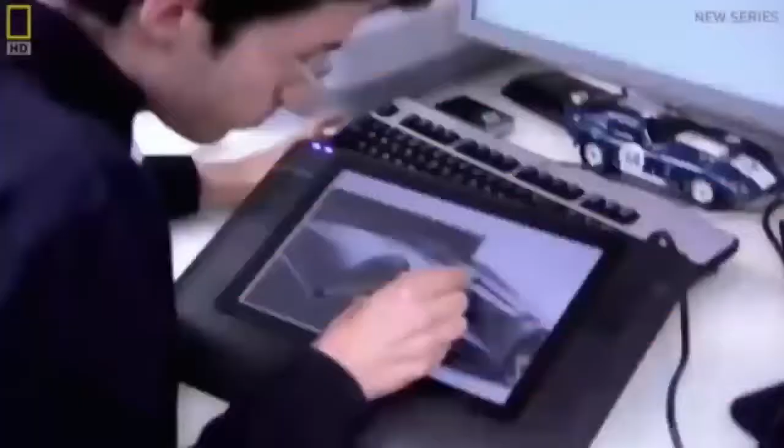But this will be no simple reworking of Lamborghini's old flagship models. Its engineers and designers are given the task of starting with a completely clean slate. And at its Megafactory in northern Italy, the Lamborghini team has been stretched to its limits to fulfill those expectations. Now, as its latest creation takes to the road, it will be seen if the high-risk strategy has paid off.

Lamborghini has been responsible for some of the world's most iconic sports cars of the past half-century. 350 GT, Miura, Countach, Diablo. The brand has achieved global recognition for its no-holds-barred approach to automotive engineering. Its extreme and powerful machines have placed it among the supercar manufacturing elite for decades. But there's no room for complacency in this increasingly crowded marketplace. And a decade since the launch of their last flagship model, the Murcielago, it's time for Lamborghini to flex its muscles once again.

It's up to Stephan Winkelmann, the company's CEO, to come up with a bold approach. One of the toughest things was to give the right briefing. And it took us weeks and months. And once I went home and I was thinking about it, so easy. It's just down to 2 words: no competitors. 4 years of intense development follow, conducted in fiercely secretive conditions. Our factory was as closed as Fort Knox. We had to prevent anybody from coming in and taking any picture to avoid leakages.

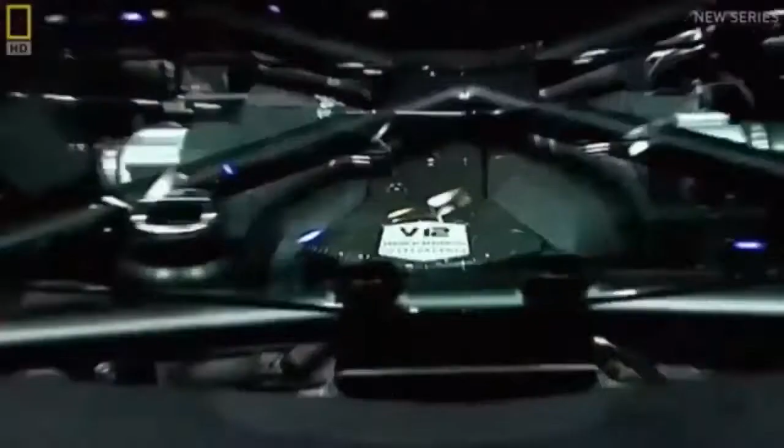Powered by Lamborghini's trademark V12 engine, the Aventador can reach speeds of up to 350 kilometers per hour, and it travels from 0 to 100 in under 3 seconds. It's their fastest car yet. But remarkably, speed isn't even top of Lamborghini's priorities for the Aventador. Stephan Winkelmann has laid out his vision in a manifesto for the future of the supercar.

Now, in our days, it's much more important to speak about the power-to-weight ratio, so the balance between the power of the car and the weight of the car. And for us, in the future, it's much more important to reduce the weight because you get a better feeling, a better driving experience. The Aventador is the first test of this new blueprint. And the National Geographic channel has been given unique access at the Lamborghini factory to witness the creation of some of the car's first incarnations.

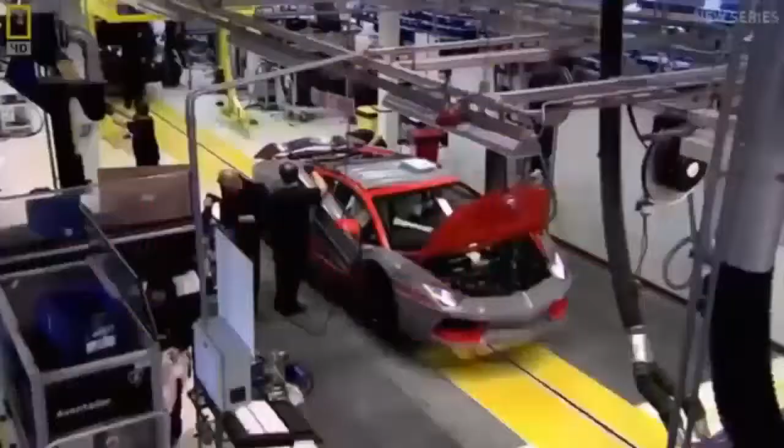This is Sant'Agata Bolognese, a typically picturesque town in the heart of Italy's Emilia-Romagna district. But it is in fact anything but typical, as it's home to Lamborghini, one of the world's most renowned supercar manufacturers. The factory is situated in the heart of what is known as Motor Valley in northern Italy. Sant'Agata is intrinsically linked to Lamborghini's success, according to its head of communications, Raffaello Porro. Everybody in the world recognizes our cars come from Sant'Agata Bolognese. And so our factory is a kind of temple where people come, you can say a pilgrimage, to visit where those cars come from.

The factory has seen many changes over the years, but its purpose has never wavered, to produce vehicles that challenge the status quo. And a largely local workforce is a vital part of that ethos. They're coming from this region, not even from the region, they're coming from this part of Emilia. You know, we are in Emilia-Romagna, it's the Motor Valley, and this is in Emilia. So a lot of our people are not only living here, they were born here, they are here since generations, and a lot of workers we have in our plant are here at the second generation.

These people are Lamborghini's lifeblood. Over 400 individuals working with a singular aim: to produce high-end vehicles that consistently capture the public's imagination. In the last couple of decades, a new breed of creative and high-tech vehicle specialists has emerged. Companies such as Pagani and Koenigsegg have set their sights on toppling the most revered names in supercar engineering. Names like Lamborghini.

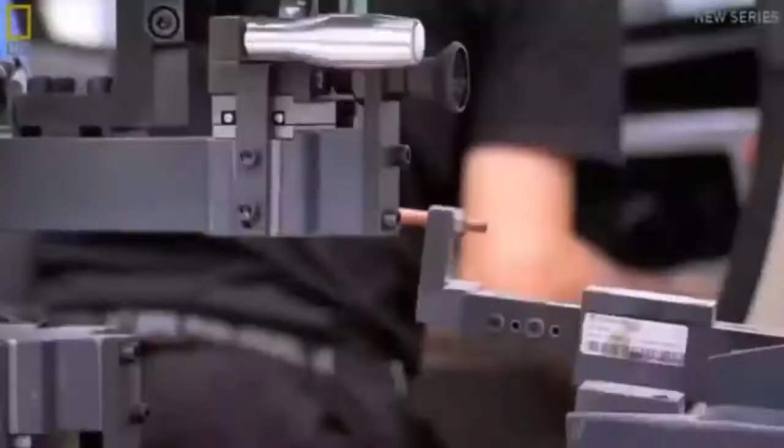But it's unlikely that this Italian giant will let its mantle fall without putting up a fight. An attitude embodied in the company's emblem, the Raging Bull. Partly inspired by the bravery of Spain's legendary fighting bulls, one of which showed such fearlessness in battle that it was awarded a trophy for its courage in 1993. Its name was Aventador, and almost 20 years later its legacy lives on in Lamborghini's latest model. It's Aventador's battling spirit that Lamborghini's development team must channel.

In 2007, they're faced with the daunting task of creating a supercar that sets the standard for all others. Maurizio Reggiani, head of research and development, realizes that the only way of doing so is to take a step into the unknown. We had to completely redefine the car, to start from a blank sheet of paper, and on this sheet determine, for each function, all that was needed to ensure that we'd have the best car in the world, to completely redefine what constitutes a super sports car.

To start from a completely clean slate is extremely high risk, and it's up to Reggiani to convince the board that it's the right thing to do. This was one of the hardest things. Why? Because the project we were presenting had nothing in common with the old Murcielago, not with anything that existed in production at all. So it really meant beginning from scratch, with all the risks that come with that.

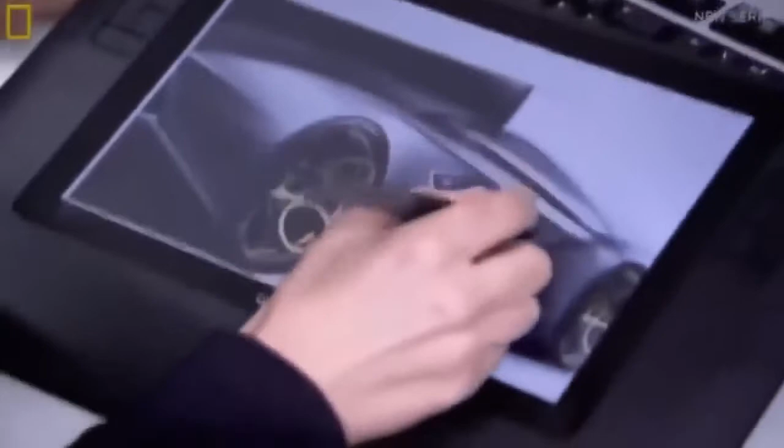But the board decides the risk is worth taking. At the end of the day, they understood very well, because this is, again, about what Lamborghini is all about. You know, to recreate and to be always revolutionary in the approach. The spirit of innovation is apparent in every fibre of the Aventador, as Lamborghini know that the fight to stay at the top won't be won through half measures.

And nowhere is that combative approach more apparent than in their focus on lightweight construction, which they've taken to new levels with an entirely new concept for road cars: a full carbon fibre monocoque. These structures are common in racing cars, but the high cost of materials and laborious production methods have made them unavailable to supercar manufacturers, who've had to combine carbon fibre with cheaper, heavier elements, such as aluminium. That is, until now.

The development team has devised a method that allows this race car technology to be mass-produced. But it requires a specialist facility that's up to the task. So in 2009, they build a whole new megafactory just down the road from the company headquarters, devoted to constructing the Aventador's unique carbon fibre body. Which, being just 147.5 kilograms, helps make the Aventador significantly lighter than the Murcielago, considerably improving the all-important power-to-weight ratio, and in turn, the handling.

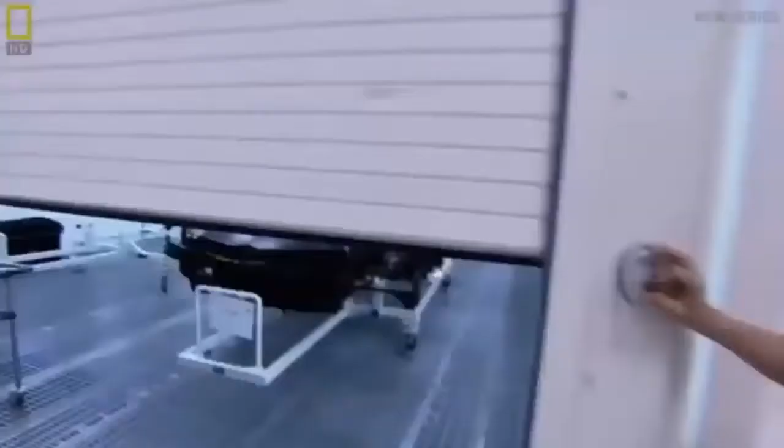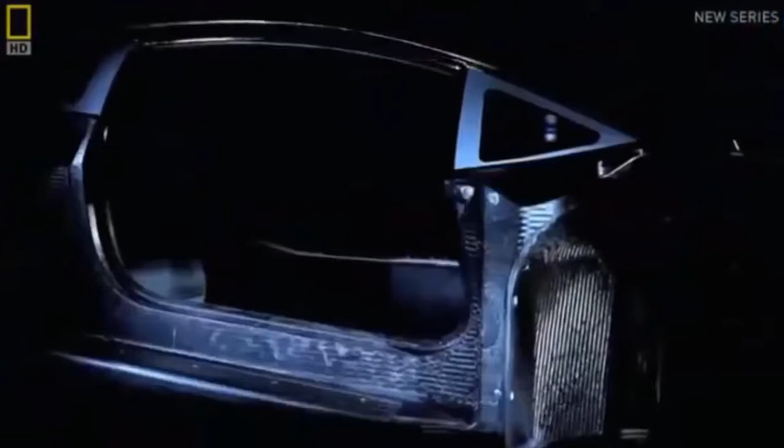Lamborghini hopes that this innovation will stave off the threat by the new wave of rival companies. Lamborghini knows well what it's like to be the cocky young upstart, vying to unsettle the established names, as that's how it began almost 50 years ago. The man upsetting the status quo back then was the company's founder, Ferruccio Lamborghini. He had made a fortune from a tractor manufacturing business and used some of his money to satisfy his love of sports cars.

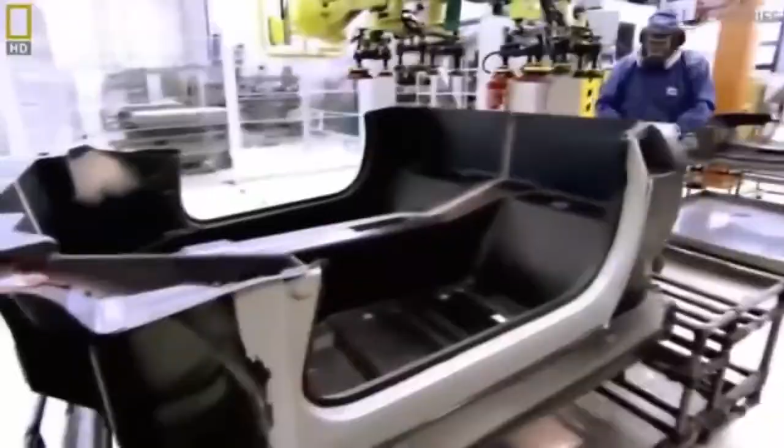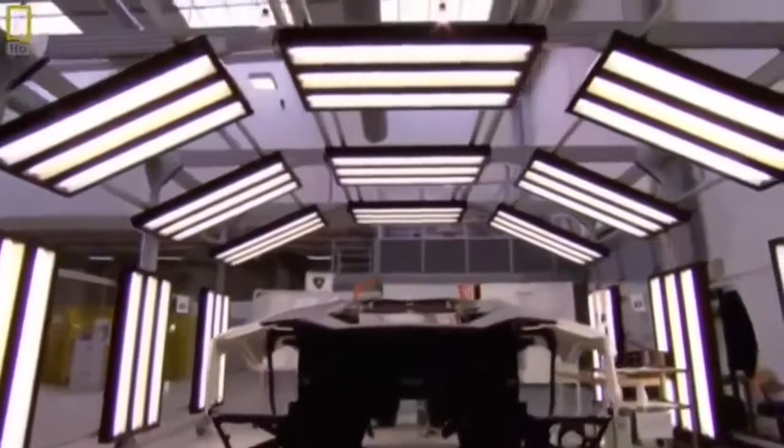According to Lamborghini legend, when he went to Ferrari to critique some of their parts, his views were dismissed. He got a negative response out of some requests he had and proposals to make a better car. And so he said, I will found my own company and I will create the best super sports cars ever. He established Automobili Lamborghini in 1963, and for the next few years he toiled furiously to achieve his goal. The cars he created were well received, but it wasn't until the launch of the iconic Miura in 1966 that Lamborghini really made its mark. The tractor maker had succeeded in breaking into the exclusive world of supercars with his bold new enterprise.

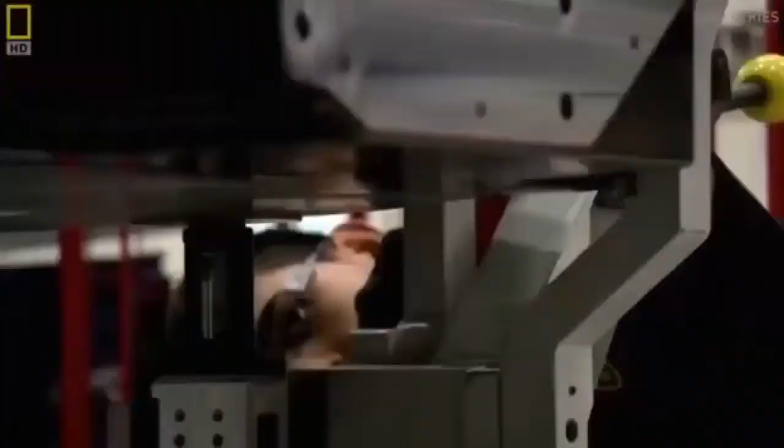Almost 50 years later, despite having joined the ranks of well-established sports car manufacturers, the company still strives to be edgy and uncompromising. As demonstrated by its approach to the area it believes will define the future of sports car engineering: lightweight carbon fiber construction. The company's relationship with carbon fiber goes back as early as the 1980s, when it created the Countach Evoluzione, a concept car which experimented with the use of composite materials.

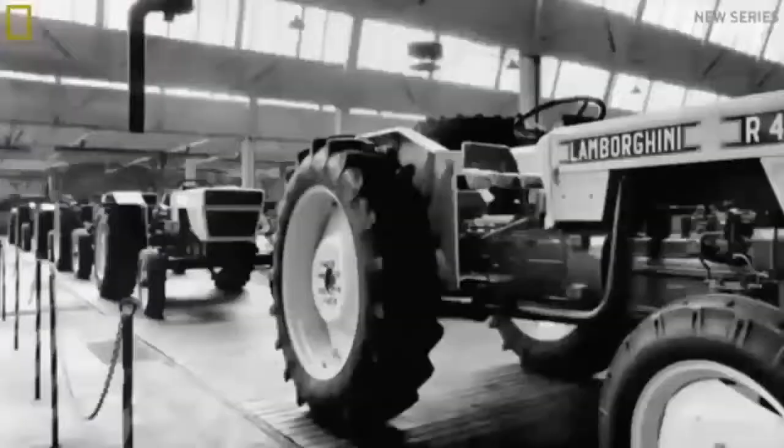It was dreamt up by the newly formed Composites department, whose successor has made many inroads into research and development of lightweight composite materials. And discoveries made here mean that next door, the company has been able to construct its new carbon fiber production facility. The man given this task in 2009 is Ranieri Niccoli, Industrial Director. And he must devise it completely from scratch.

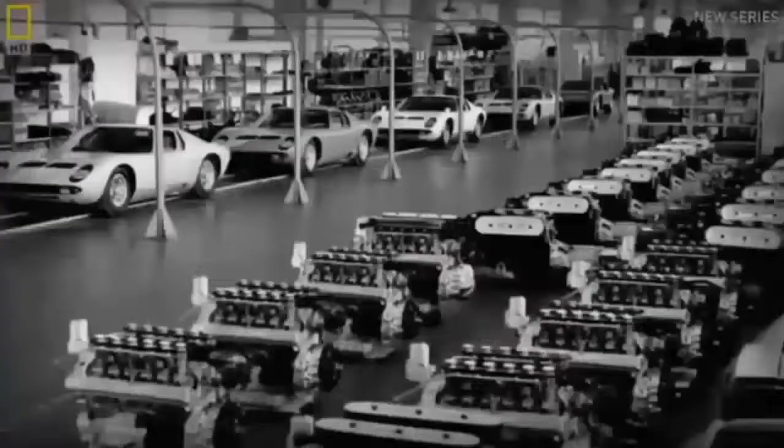So when we designed and we built this factory, we didn't have any automotive benchmark. We were the only one in the automotive business to build and to run this kind of technology. So they have to look elsewhere for inspiration. So we look to other sectors, for example, the aeronautic sector. Then we adapt and we modify their process to a Lamborghini production system in order to build our car.

The result is 500 square meters of new production space, known as the CFK, devoted entirely to sculpting the Aventador's super lightweight monocoque. Here, 146 carbon fiber specialists toil day and night to create 4 complete monocoques every 24 hours. To achieve this target, engineers have developed a unique production system. All materials are first cut by an automated machine before being sent for preparation.

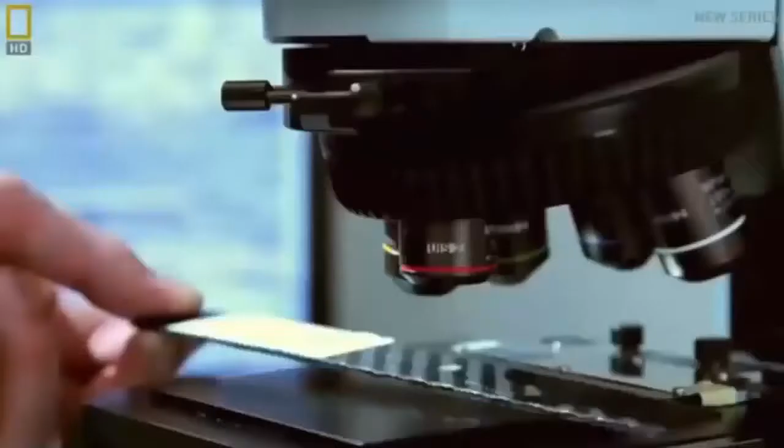The material is placed into molds and laminated in a vacuum bagging process which forces the layers into shape, before being cured in a large pressurized oven known as an autoclave. Meanwhile, the production of other parts of the monocoque is underway, as operators fine-tune and cut more layers of carbon fiber with the assistance of precision lasers. A special press is used to inject resin into the carbon fiber mats, which transforms them from soft sheets of cloth-like material to a strong, rigid structure.

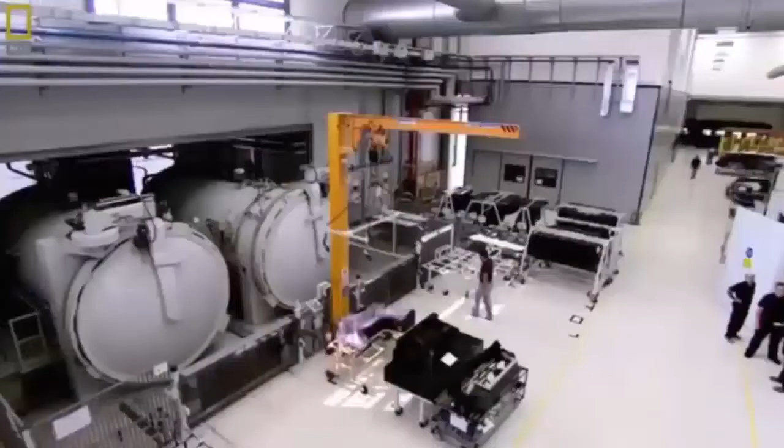After all these processes are over, the 2 key sections are finally recognizable: the base section, known as the tub, and the roof. They're placed in an automated machine, which drills them with holes allowing for attachments to be made later. Throughout the factory, computer-controlled machines share tasks with human specialists, a partnership that's integral to the Lamborghini production process.

The main priority of our plant was to follow the Lamborghini production system. So, with a high degree of craftsmanship, high degree of skill, people, combined with a technology, with automatization process. This was the main challenge that you can also see in our plant.

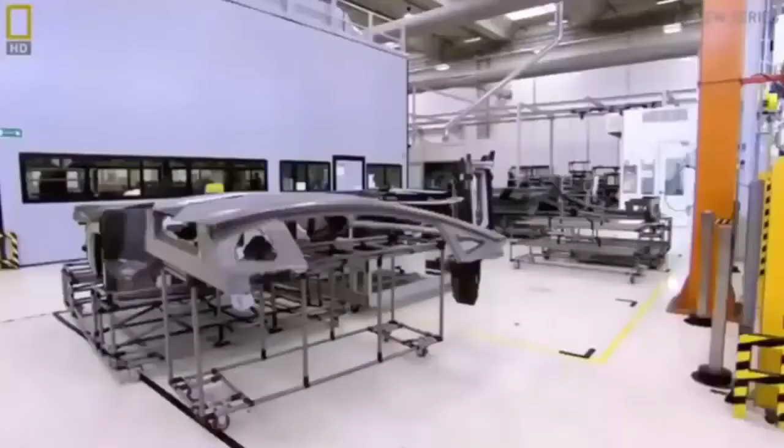Aeronautic-inspired engineering is ingrained in many aspects of the Lamborghini CFK production process, such as this stage, known as the Harmony Hammer Test. In this quality control test, an operator strikes the monocoque section with a specially designed hammer and allows it to vibrate, listening out for areas where air might be trapped in the carbon fiber shell. Once checked, the parts are ready for their union, as the tub and roof are glued together, turning the monocoque into a single entity.

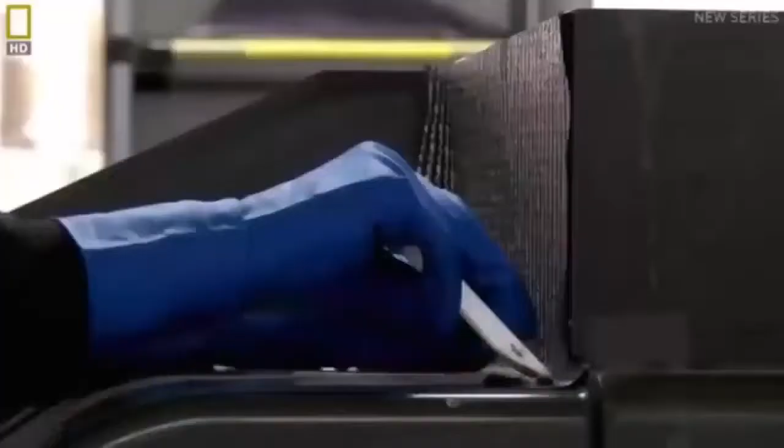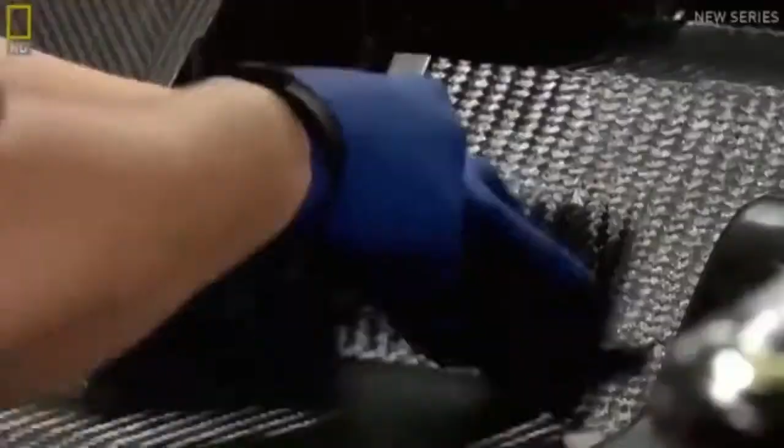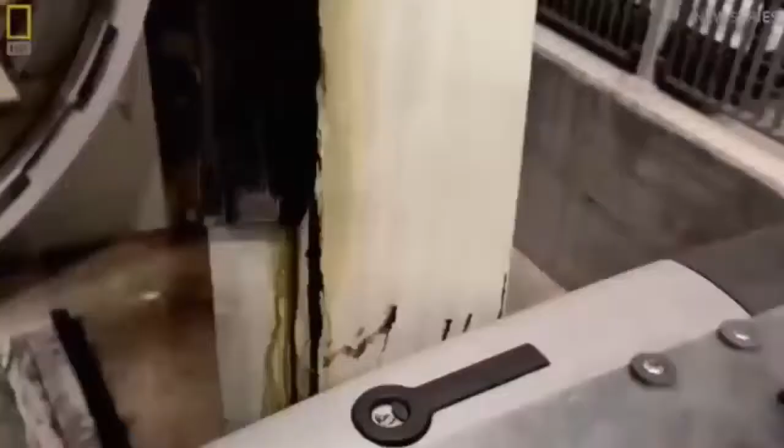It's essential that the 2 parts of the monocoque are exactly aligned, so workers use a robotic arm with a 3D laser attachment to check that the sections have been coupled correctly. Once the correct dimensions are confirmed, metal sections are manually attached to the monocoque and the body is complete. Then it's into a light tunnel where surfaces are quality checked to ensure they're in pristine condition before the Aventador's body is signed off for release.

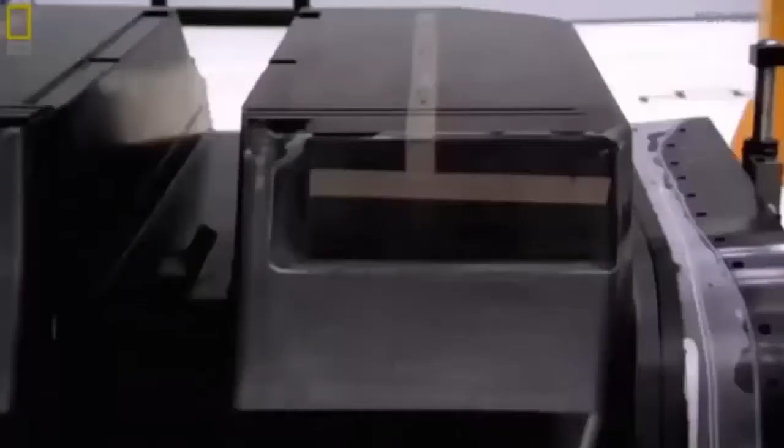As the body is ready to leave the carbon fiber plant, it's possible for the first time to see the Aventador's unique geometry taking shape. This extreme design is one of the most recognizable aspects of the Lamborghini DNA. And it's a tradition maintained and pushed forward here, at Lamborghini's Design Center, or Centro Stile. The generational leap required of the Aventador does not stop with its engineering capabilities. The look of the car is integral to its ambition.

The design of Lamborghini always has to be revolutionary. Yes, you have to understand, if you see a car in front of you, this can only be a Lamborghini even if you don't know the model. So it's very tough for our designers because they have to create something new, but recognizable at the same time.

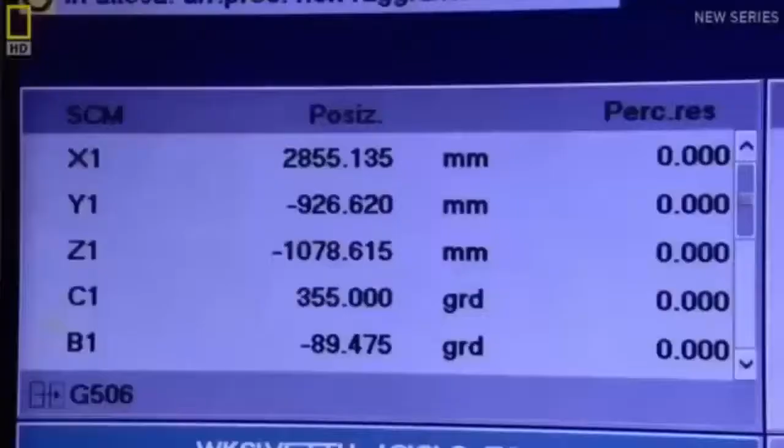The job of the design team and its chief, Filippo Perini, is made even tougher during the earliest phase of the Aventador's development, when the board forces them to compete with outside companies to earn the right to design the new model. And at one point, victory comes close to slipping through their fingers.

The hardest moment was when during the process we realized that we were at risk of losing the project altogether. This was a critical point in the process when we realized that we had to be more innovative, more unconventional, more extreme, unexpected, and uncompromised.

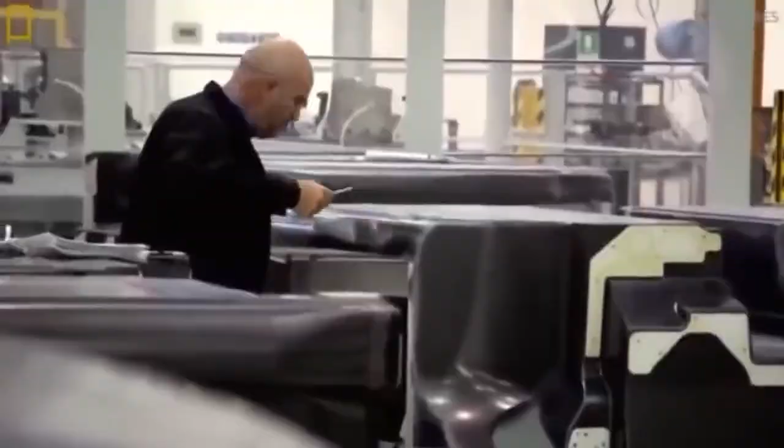Più extreme, unexpected, uncompromised. It's tough going, but the competitive spirit has a positive effect on the team, and their proposal wins the day. What results is a design imbued with a deep understanding of the company's past. Our design is driven by the history that we have. It's translated into the desire to always do something innovative, to create a different object interpreted in the most futuristic way possible. This is part of the Lamborghini history.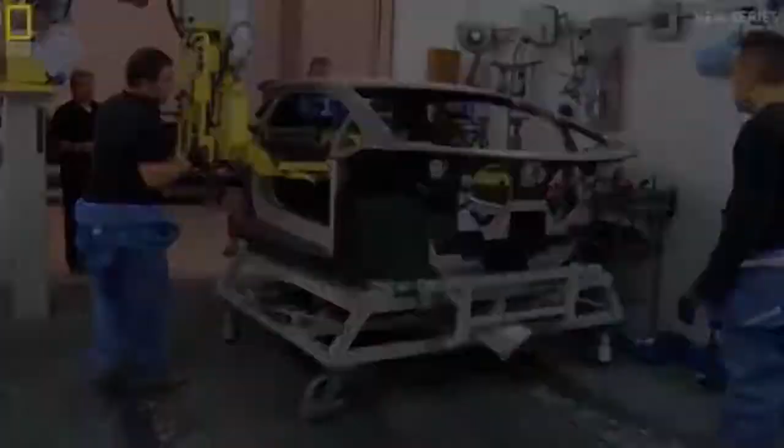Certain design elements are considered vital parts of the Lamborghini flagship DNA, such as the famous scissor doors. But beyond that, the design team have free rein to create something completely new. They have a sharp eye for aesthetics, but they also need a comprehensive understanding of the car's engineering needs. For style choices can only be made if they contribute to the car's high-level performance.

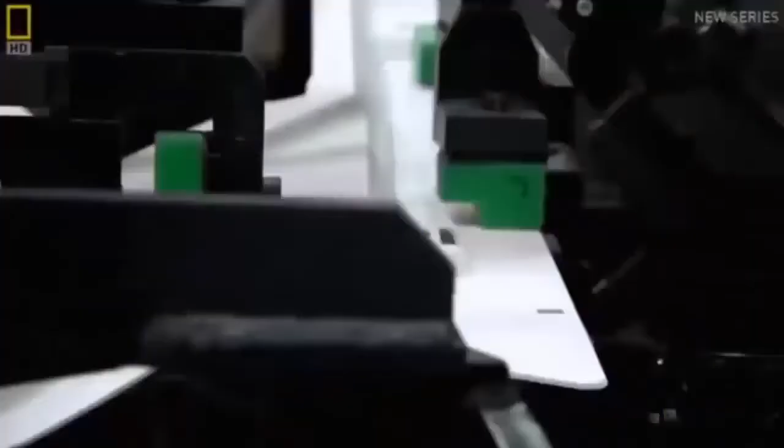Form always follows function, so there is nothing which is fake. Every air intake, every flap, everything is for real. So it's not pimped up, and this is tough, because at the same time you have to do something which is very emotional. One engineering hurdle for the design team is the need to provide the Aventador with sufficient air to cool its V12 engine.

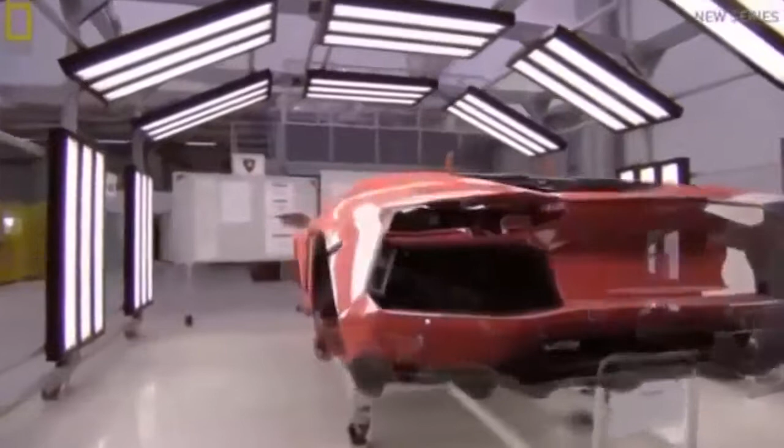In terms of design, we had to resolve the problem that this car, this package, demanded a big engine radiator positioned at the side sections of the car. So it needed a large air vent, which right from the start prevented us from dividing the mass of the car in 3 separate blocks, as we'd normally do. Going back now to the actual design, this architecture gave us the unique opportunity to design a car with one single line, this one.

What emerges from this balance is a car whose style is intimately linked with its role as a high-performance vehicle. And its sources of inspiration are many, drawn from one of the team's most important tools, the brainstorming board. So we take it from nature, sport, technology, lifestyle, elements that we can integrate, and in that way, brainstorming gives us many design options.

Details like the ignition button and TFT screen seem to come direct from a jet fighter cockpit. And the world of aeronautics influences a lot of other style choices besides. We think that aeronautics, airplanes, fighter planes, but even transport planes are the nearest expression to true beauty and the most advanced design that you can have from an artistic point of view, and also of functionality.

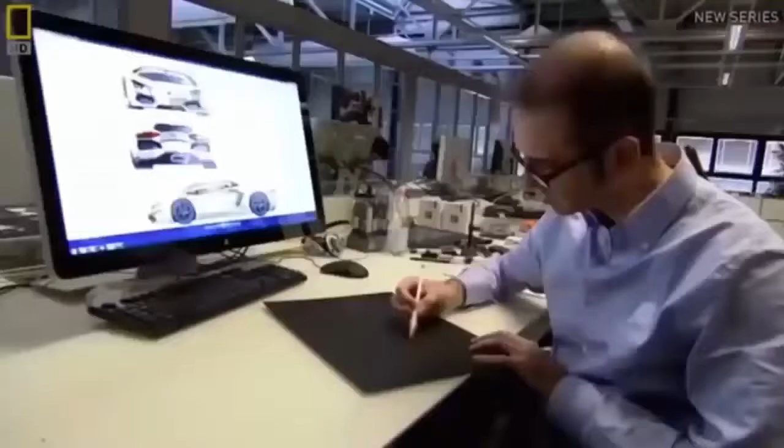After that, it's sent for another quality check in a light tunnel. For 2 hours, an inspector walks around the bodywork, checking for colour perfection. If there's any inconsistency, the offending section will be sent back to be repainted. Under-polished areas are also marked out for extra attention. These hundreds of hours of devotion end when the exacting standards of the inspector are met, and the car is released for the next phase of production: the assembly line.

The assembly line for the Aventador lies just meters from the original site of the Lamborghini factory, built almost half a century ago. Back then, its founder, Ferruccio Lamborghini, was known for his hands-on approach, frequently seen on the factory floor, directing operations. He focused on the skill of the mechanic as being key to the success of the product, and that attitude still permeates the site today. Here, 50 workers spread over 11 workstations are responsible for the task of assembling Lamborghini's latest model.

The man in charge of making sure things run smoothly is production manager Andrea Costantini. He sees his highly trained workforce as a direct link with the roots of the company. In this case, the workers are the most trained. We take these guys directly from the best schools of mechanics of Emilia-Romagna here, the surroundings of Lamborghini, and we train them for more than 2 years to allow them to be really the best experts on mechanics and engines. So everything is done manually, still like we did since 1963, since when Mr. Ferruccio Lamborghini, the owner of Lamborghini, started.

In an age when machines dominate production in almost every field of manufacturing, loyalty to the art of skilled manual labor is not often seen. But here it's believed that when it comes to reliability and precision, humans still have the edge over machines. And nowhere more so than in the engine assembly station. For this is where the heart of the Aventador is put together: the Lamborghini V12.

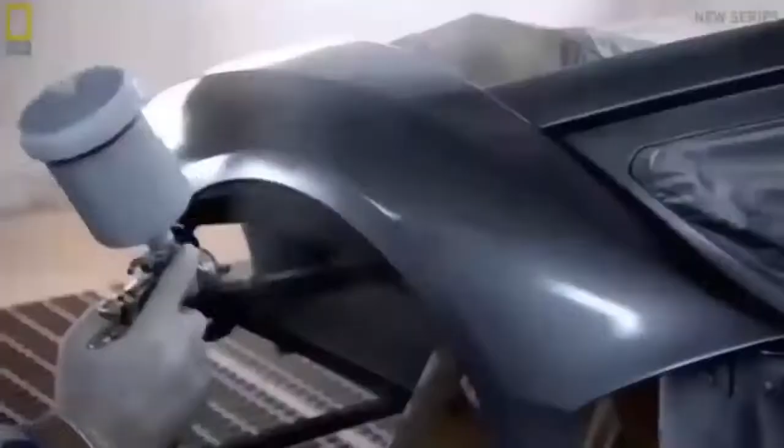With 6.5 litres of displacement and 700 horsepower, the Aventador's V12 is about as gutsy as it gets. But as with everything else, it's had to move with the times. Lightweight, again, is the order of the day. And despite the fact that this engine is more powerful than the Murcielago's, it weighs less, just 235 kilograms, by using aluminium silicon alloy on components such as the crankcase.

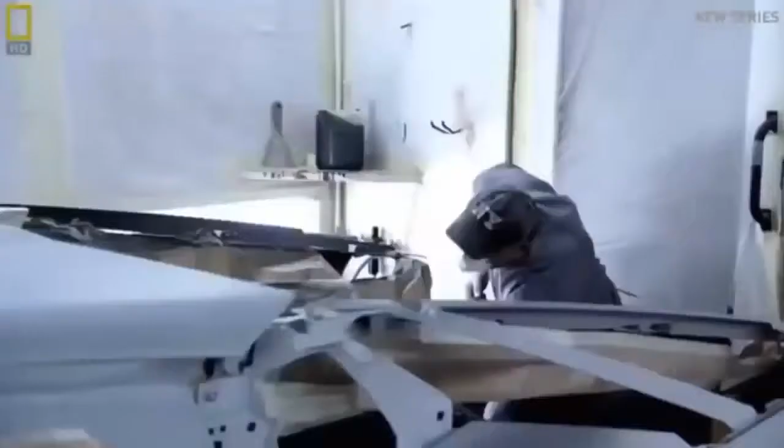The main purpose of the V12 is to power the Aventador. But when linked with the car's exhaust system, it takes on another significant role: creator of the mighty Lamborghini Orchestra. The V12 motor represents what for us is the sound, the music of the car, the way in which it's presented to the public, the way she makes herself heard and announces her arrival. To achieve this, we invest a great deal of time in simulations. We simulate the sounds that we can have, and then we experiment first in the lab and then on the vehicle itself. This 12-cylinder symphony has a full range, from a moderate rumble through the town at low revs to the screaming crescendo of maxed-out gear shifts.

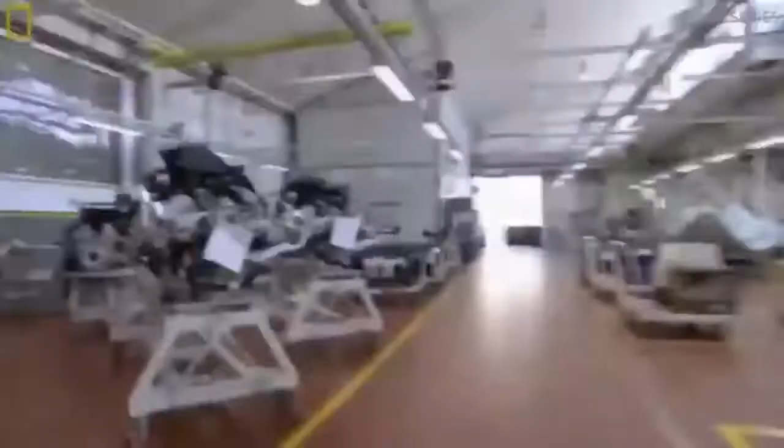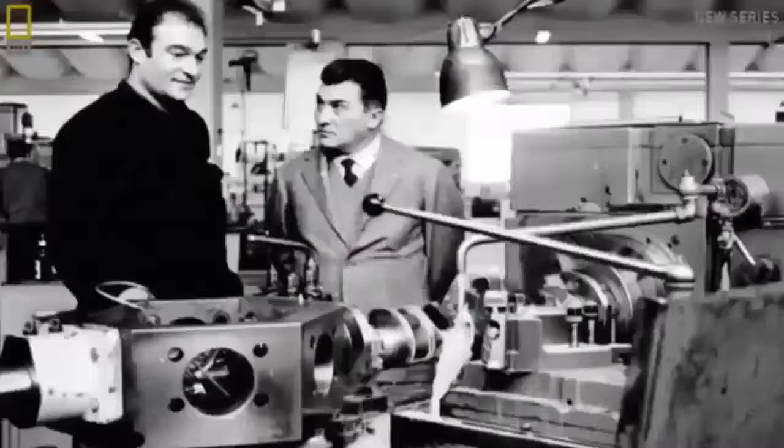While the V12 is being assembled, the body of the Aventador arrives on the assembly line, ready for conversion from an empty shell into a fully functioning supercar. As the company's latest foray in a highly competitive market, the Aventador needs a production process with efficiency to match. The drive for improved efficiency was for sure coming from the market, from our competitors. We always have to be the best, to be the number one in terms of product, in terms of performance, but also in terms of quality. So to become and to stay the number one, we always have to have a huge increase of efficiency, a huge increase of quality in the assembly line and in all the processes inside the factory.

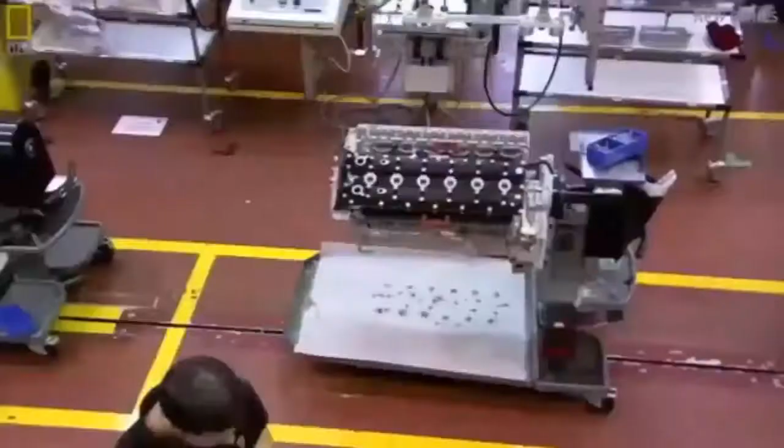The company's output of luxury vehicles is a mere fraction of what the large-scale manufacturers produce for the mass market, with around 800 Aventadors due to be created in the first year. But that doesn't mean the factory can't be run to similarly exacting standards of efficiency as the largest groups. And that means that workers have just 1 hour and 40 minutes to carry out a whole range of highly meticulous tasks. If they take too long, the whole assembly line will stall, targets will be missed, and costs will mount up.

The countdown starts here at the first station. Work is carried out on the underbody and front differential by lifting and rotating the vehicle to give the mechanics easy access.

Before being readied for what is arguably the most significant stage in the Aventador's production, the insertion of the colossal V12 powertrain into the car's chassis.

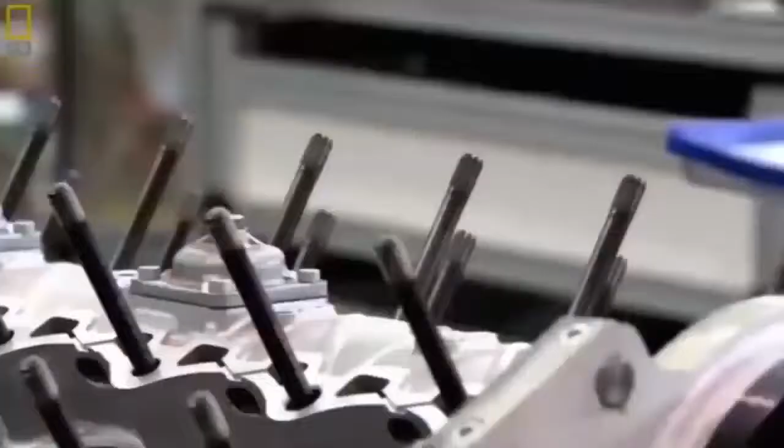Here we are in the most critical assembly station of the Aventador assembly line. Here we have the assembly of the engine, the heart of the car, basically inside the body in white. We call it the marriage between the car and engine. This marriage of elements is when the development team's work of the past 4 years comes together, where design and engineering combine.

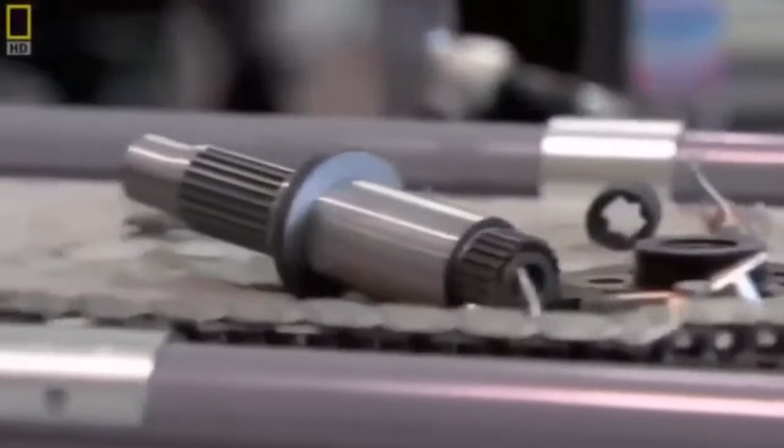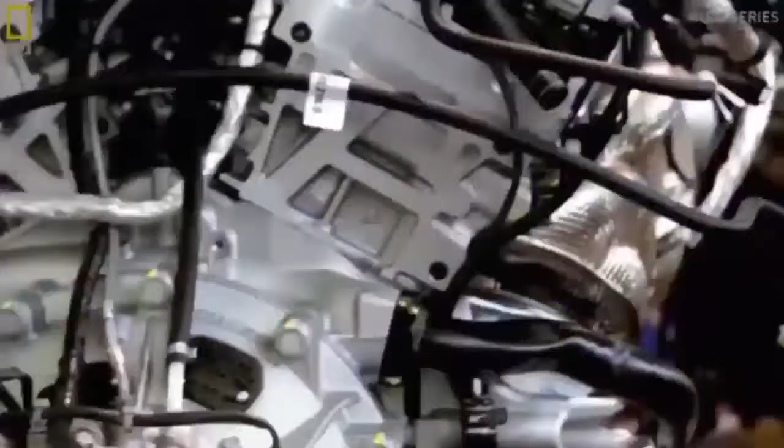Here, as with all other phases of production, the specialists of each station take full responsibility for their section. You can see the workers sign each and every single connection to be sure that each and every phase was done in a good way. The risk in this case is the car is not working properly after or during the road test, and could be a big problem for a customer using it. As you can see, this is absolutely not done with equipment, robot or other automatics, but is done manually.

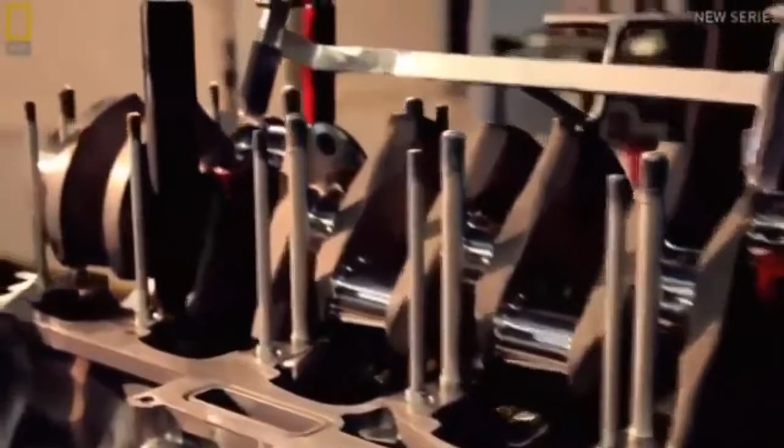Step by step, the car is taking shape, being molded from empty shell into the fully formed supercar that will leave the factory. And while the assembly line is in full flow, next door, the second critical aspect of the Aventador is being prepared: the interior. It's in this sector of the factory that a customer's individual preferences for the way their car looks can really be indulged.

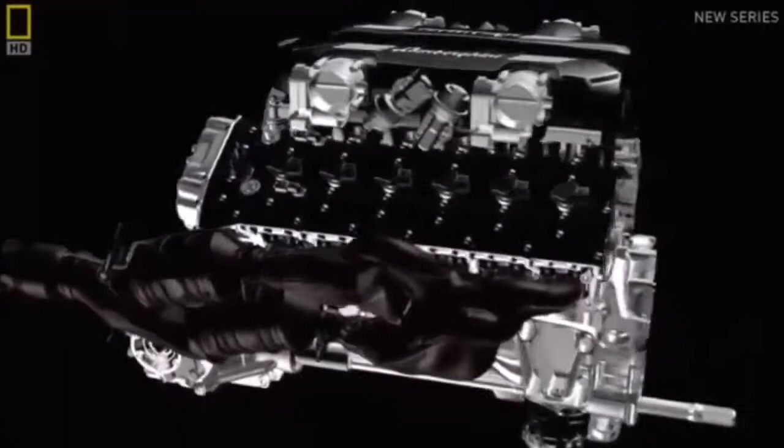About 100 square meters of leather hide in 9 different colors arrives each day. Attention to detail is essential to pass the stringent quality control checks. Here, a leather specialist looks for minor imperfections in the hides and marks them up wherever found. An automated machine recognizes the marks and cuts around imperfections, leaving only pristine material for the Aventador's interior. The leather is then taken to specialists with 3 years training to be stitched and glued onto the various parts that make up the Aventador's interior.

Back on the assembly line, one of the Aventador's most important pieces of kit is ready. This simple-looking item is the suspension, but its apparent simplicity belies the creativity that goes into its engineering. The Aventador uses a pushrod suspension system direct from the world of Formula One race cars. It works by keeping wheel control and damper elements separate. By keeping the damper elements inboard, the pushrod system allows the wheels to maintain maximum contact with the road when going round bends, massively improving the handling on corners, a must for a car that can hit speeds of up to 350 kilometers per hour.

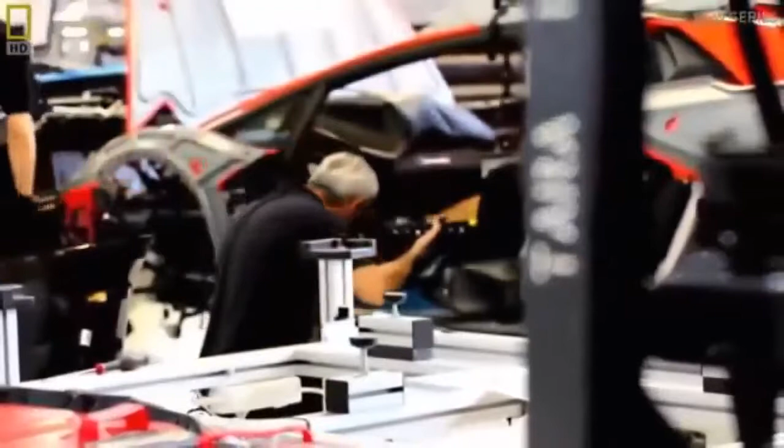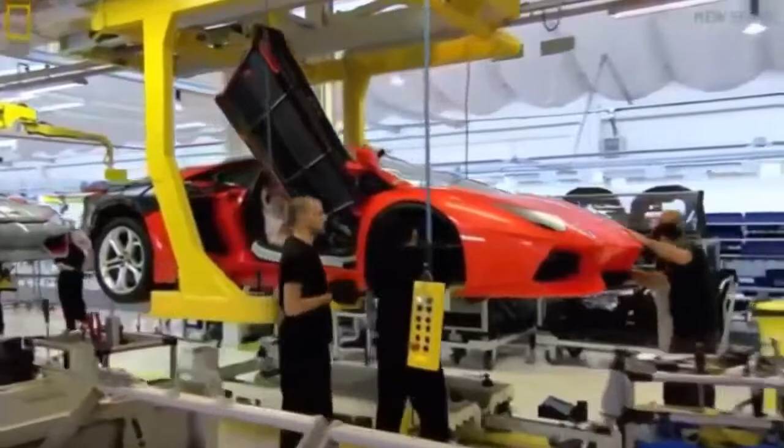The Lamborghini patented independent shifting rod transmission. This technology allows the shifting process to run virtually in parallel. While one shifting rod is disengaging one gear, the second shifting rod can already engage the next gear, creating a shifting time of just 50 milliseconds. Not far off from Formula One transmission times, which average around 30 milliseconds.

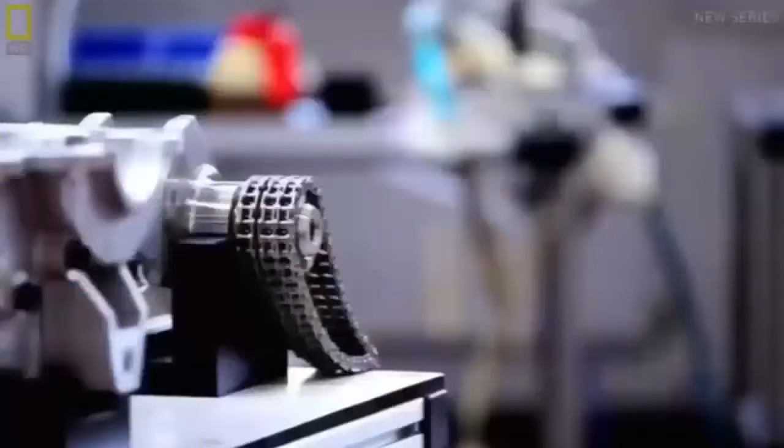Such technological innovations are only made possible by extensive testing of the vehicle during the development phase. And possibly the most critical moment for the engineers is when the prototype model takes to the track to be put through its paces for the first time. For the Aventador, this happens back in 2008.

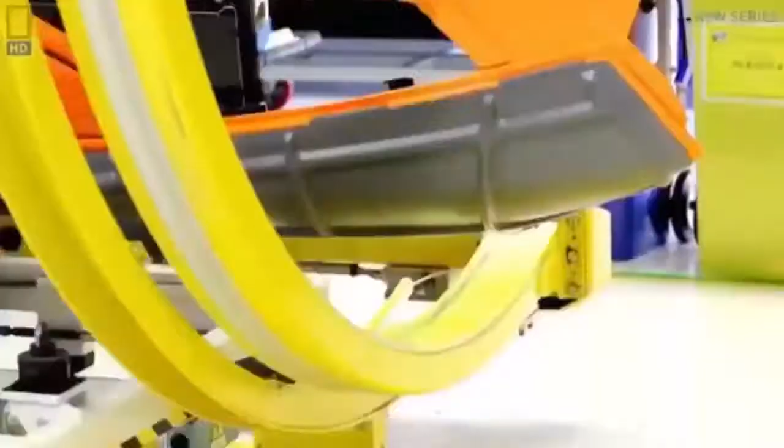Then we found ourselves at the first track run of the Aventador, which generated an indescribable emotion. At night, on the Nardo track, a small group of people seeing a creature move for the first time that had needed years and months, nearly a year and a half, before it was able to move. And the perception, after these first laps, based on what our test drivers told us, was that we'd created something that really was the new landmark for super sports vehicles.

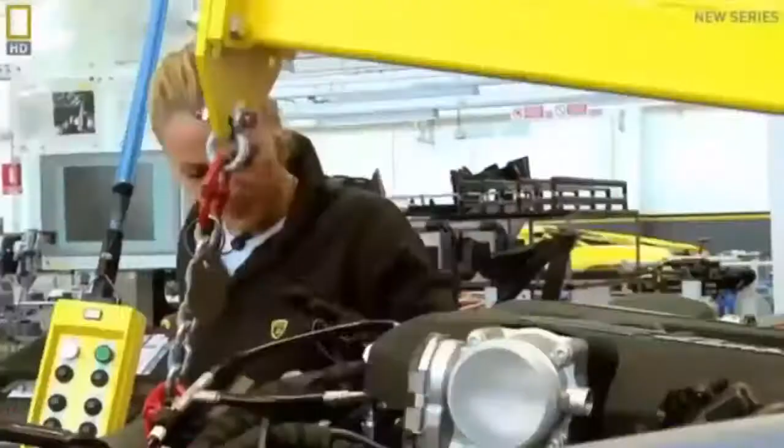The man behind the wheel of that prototype Aventador was Lamborghini's chief test driver, Giorgio Sanna. He's been a key member of the Lamborghini development team since 2001, a dream job for many, but the thrill of driving prototype supercars comes with certain pressures.

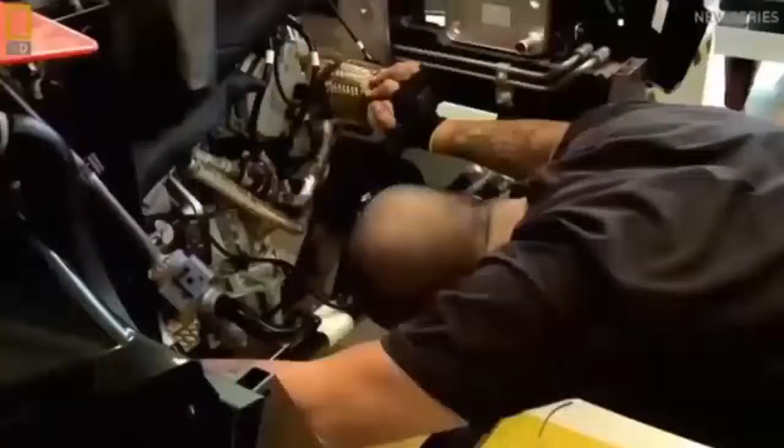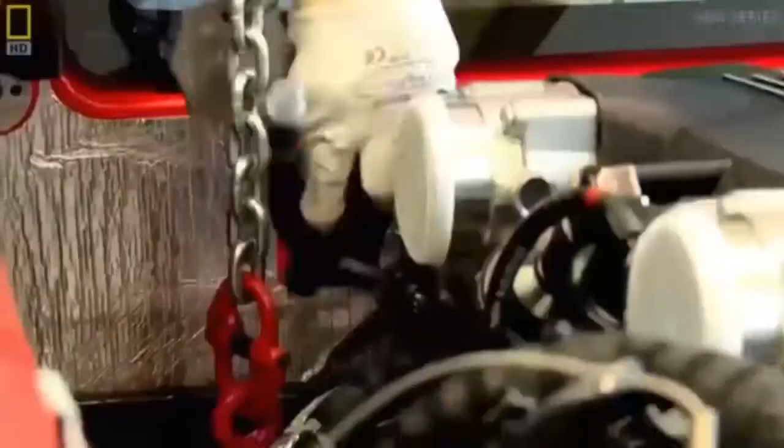So when he puts the prototype Aventador through its paces for the first time in late 2008, he's greatly relieved to discover that years of intense development have not been in vain.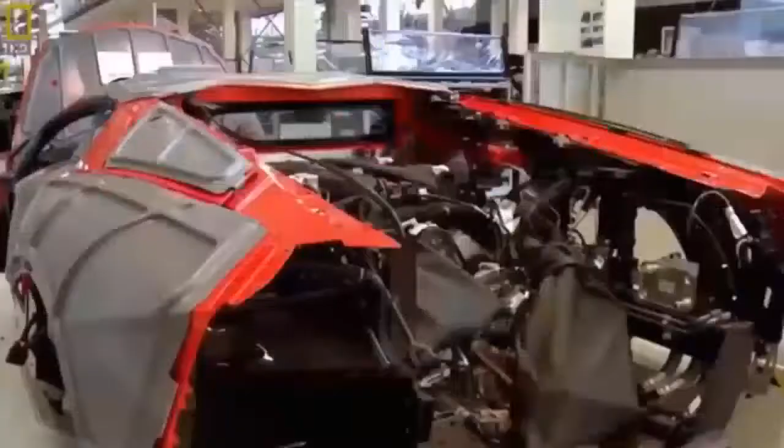The Aventador is reaching the final stages of the assembly line, and mechanics work quickly to get it ready for the next phase of production. Here we are in the last workstation of the Aventador assembly line. After four days of assembly, over 50 workers in the line and more than 60 in the saddlery and the engine have assembled our cars.

As important as the assembly process itself is the series of quality control checks that the car must undergo once it's complete. Any minor imperfection could impact on the car's performance, and its safety elements in particular must be rigorously tested.

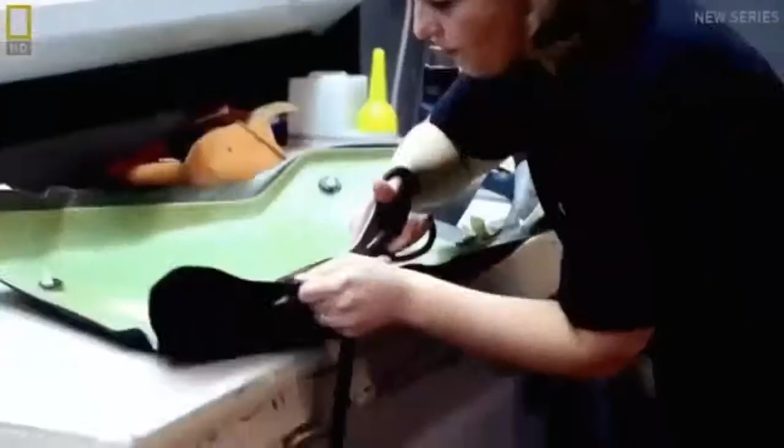The brakes are checked in a room where the car is driven at speeds of up to 140 kilometers an hour on a rolling road. The Aventador's carbon ceramic brakes can take it from 100 kilometers per hour to a complete standstill within 30 meters. And in theory, the Aventador is capable of going from 0 to 100 and back to 0 in less than 4 seconds. Data from the anti-lock brake system is transmitted wirelessly to two dishes, then into a computer mainframe for analysis.

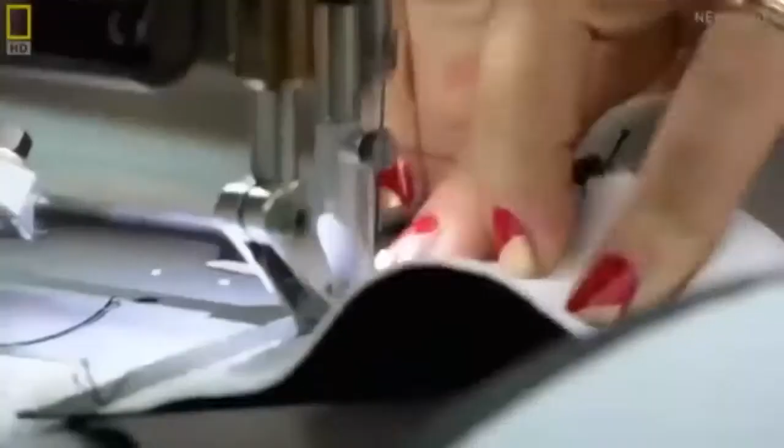The final task of the factory workers is to scrutinize the car in a light tunnel to ensure that aesthetic standards haven't been affected during the assembly process. But before it can be shipped to whichever global location it's destined for, each Aventador must undergo one final phase: the all-important road test.

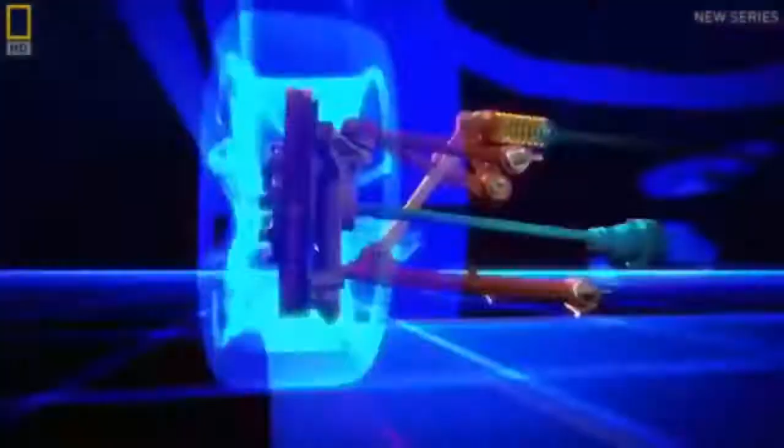Every car is given its own test drive around the local area. They're put through their paces to check that their complex engineering is absolutely in tune. And it's here for the first time that the cars are enjoyed as they were intended to be. Only once the test driver is satisfied that all aspects of the Aventador have been properly configured will he sign it off for release to the outside world.

The Aventador has come a long way since the brief was first given for its creation in 2007. Years of struggle from designers, engineers and mechanics have culminated in a vehicle which looks likely to remain as Lamborghini's flagship model for some time to come. The risk of starting completely from scratch has paid off. And with the new era underway, complete examples of the Aventador are rolling off the assembly line at a rate of 20 each week.

But for Lamborghini, the challenge does not end here. As the company celebrates its 50th anniversary in 2013, it will be thinking of new ways in which it can push the boundaries of automotive engineering. Stephan Winkelmann suggests that a different era might be around the corner. Our two-model strategy for the future will not be enough, so we decided to step into a third model. It will be a Lamborghini which you are able to drive every day, so a very usable Lamborghini, but it will always have the DNA of the true Lamborghinis inside.

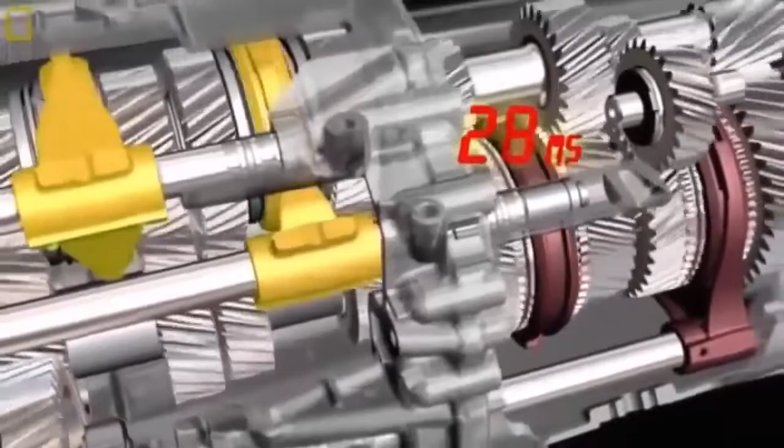A Lamborghini for everyday use may be on its way. But until then, the Italian supercar manufacturer will focus all its efforts on producing vehicles which aim to keep them ahead of the competition. And right now, the car leading that charge is the Aventador.